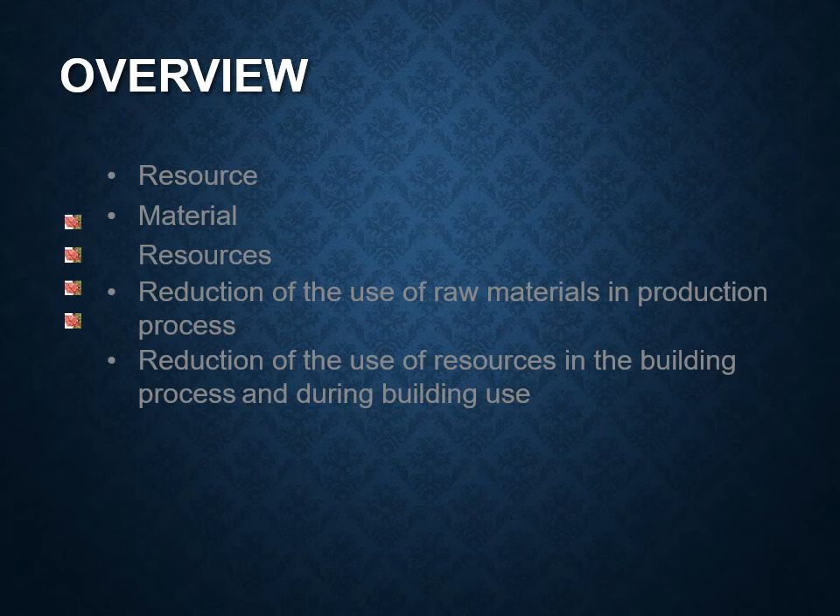For introduction, let's first understand what is resources, or what are resources in this case. In this world, or the earth resources itself, usually kita akan define dia dengan there are two types of resources, which is one renewable and one is non-renewable.

Satu diperbarui dan satu tak boleh diperbarui. So what are the examples? What is renewable resources? Basically renewable resources is something that's sustainable, usable, berulang kali. You can actually use it for repeated times, or the resources are infinite or sustainable, ataupun mampan lah. Contoh resources yang mampan, contoh kita boleh relate.

Resources yang mampan contohnya macam air. Basically air, there's a cycle to it, daripada air hujan turun ke tasik, and then it is being evaporated, then it goes back into condensation process, become cloud, and eventually become a rain cloud that keeps the whole cycle sustainable. Ataupun contohnya matahari, cahaya matahari, this is one of the hottest topics, contoh resources natural resources yang hangat diperkatakan sekarang, in terms of power generation.

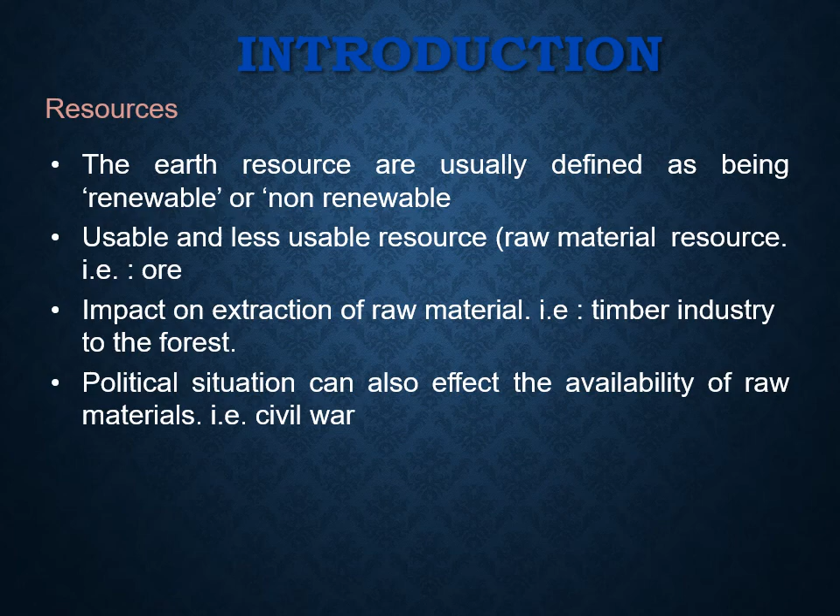The building industry is basically the largest consumer of raw material in the world - that's factual, for everyone's knowledge - and this is after food production. Because the industry itself is ever growing, the building industry is so huge that it does not focus specifically on buildings alone.

When we talk about the building industry, we talk about the use of sand, aggregate, bricks and so on at the very basic level. But in reality, when we look at construction, there's a huge number of factors playing into it. And if we look at Malaysia, the construction industry is among the highest GDP contributors - meaning the generation of national wealth or economy is also largely focused on the construction industry itself.

It's after food production because food production itself is a necessity, so we don't need to mention that obviously. In order to sustain and make it sufficient and available throughout the world, we need to understand the cycle of material it goes through on a daily, time-to-time basis.